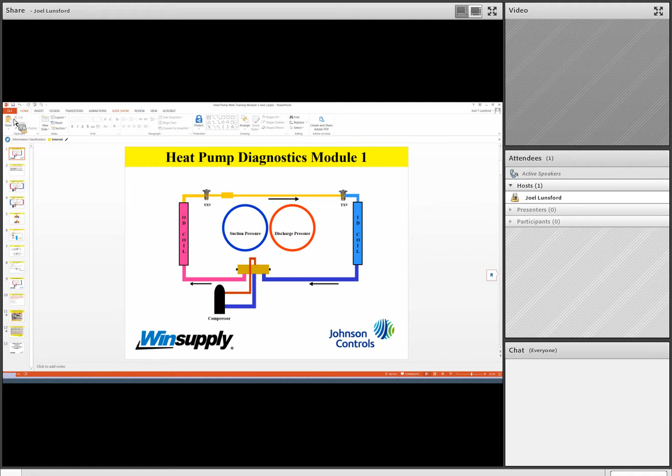Okay, at this time we're going to go ahead and do Heat Pump Diagnostic Module 1.

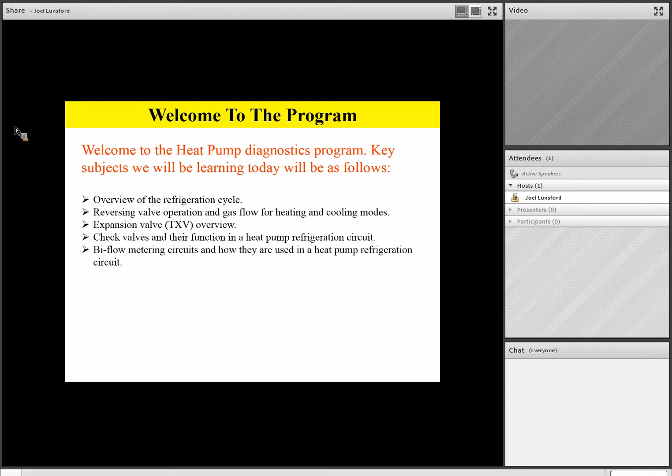refrigeration cycle. So the first thing we're going to talk about today is going to be our refrigeration cycle in the cooling mode. As we take a look at our diagnostic screen and the graphic, you'll notice that starting at the compressor, we have a hot gas line coming from the compressor into the single line into the reversing valve. Now remember, team, when we're in the cooling mode of operation, the outdoor coil is a condenser and the indoor coil is acting like an evaporator.

You'll also notice on the screen that the outdoor coil in the cooling mode will be color-coded red or a bright pink, indicating it's hot gas going into that coil. You'll also notice that on the indoor evaporator in the cooling mode of operation, the coil is color-coded blue, indicating it's cold or cool. So from the compressor, we have hot gas to the single line on the reversing valve, and in the cooling mode of operation, we divert that hot gas to the outdoor coil that's

acting like a condenser. We then come out of the outdoor coil through a bi-flow TXV, and remember, team, in the bi-flow configuration, in the cooling mode of operation, the bi-flow TXV outside has to flow that liquid refrigerant out of that coil freely. So we have liquid refrigerant going through the outdoor bi-flow TXV in the cooling mode. We go through a bi-flow filter drier down the liquid line to our bi-flow TXV on the indoor coil.

Now remember, in the cooling mode of operation, the bi-flow TXV should be metering refrigerant into the cold coil, and it is, and we see that as being a blue color code. We then meter refrigerant into the indoor coil where it boils off, absorbs heat from the air passing over the coil, and changes state into a cool vapor. That cool vapor then travels down the indoor coil vapor line back to the reversing valve where it loops through the reversing valve back to the common suction line on the compressor.

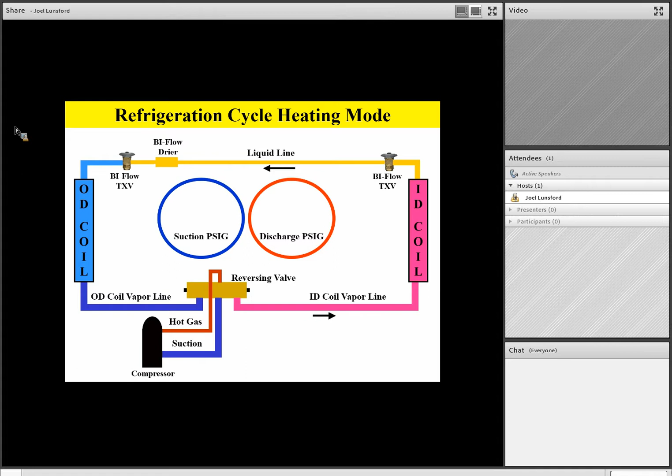In the heating mode of operation, we shift that reversing valve, and now we have hot gas from that single hot gas line from the compressor going to the indoor coil that's acting like a condenser. And then the outdoor coil is acting like an evaporator, so we have cool gas coming back from the outdoor coil, looping back through the reversing valve to the compressor suction line. So as we take a closer look, the reversing valve is responsible for diverting hot gas either to the outdoor coil in the cooling mode or the indoor coil for the heating mode. And this is how we achieve heating and cooling operation on the heat pump.

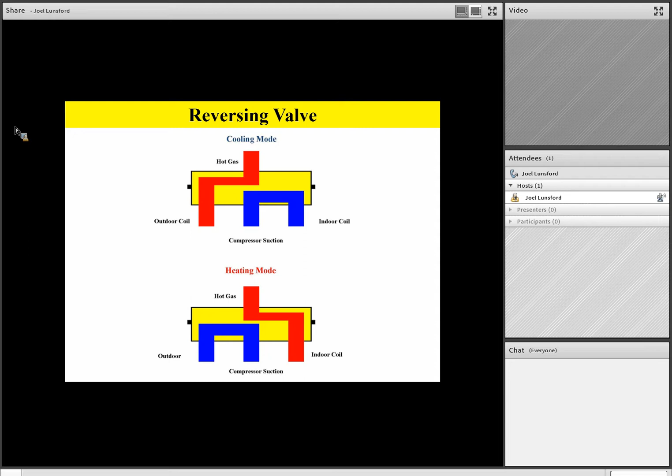A very, very important device in the heat pump is an expansion valve or some sort of metering device to meter refrigerant into the cold coil. Now, team, at this time we're going to stop using the verbiage of evaporator and condenser, because we found out in our review that it doesn't really matter which coil is acting like a condenser or evaporator. In the cooling mode of operation, the outdoor coil is warm and the indoor coil is cold, and in the heating mode of operation, the indoor coil is hot or warm and the outdoor coil is cold.

That sensing bulb is clamped onto the cold suction line or the cool vapor line leaving the cold coil, and inside that sensing bulb there's actually a refrigerant. That refrigerant, when it starts to warm up inside that sensing bulb, will exert pressure on top of the diaphragm of the expansion valve, also called the TXV, and it will drive the valve open against spring tension. As we drive that valve open, we'll actually add more refrigerant into the cold coil. As we add more refrigerant into the cold coil, it'll start cooling down some.

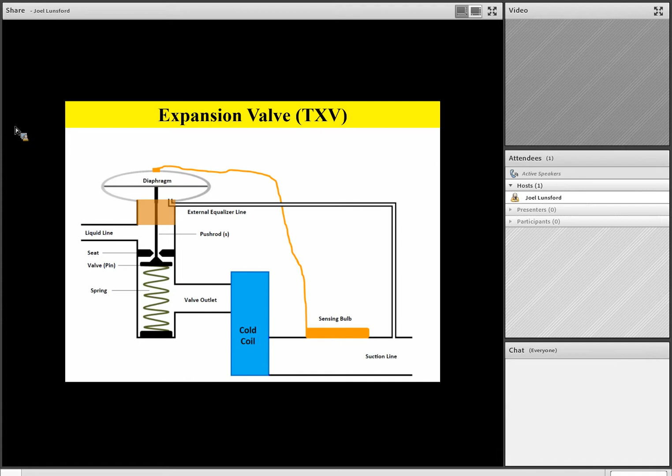The next thing we're going to talk about in our heat pump module 1 today is check valves. You're going to have some sort of check valve in the liquid refrigerant circuit on a heat pump in order for it to operate in both heating and cooling mode. We achieve that with a device called a check valve. Now the check valve is very, very simple.

So a check valve is a very simple device that blocks refrigerant flow in one direction, but when refrigerant is flowing in the opposite direction, it allows it to flow freely. This is a key point we need to remember. Check valves are an integral part of a heat pump refrigeration circuit.

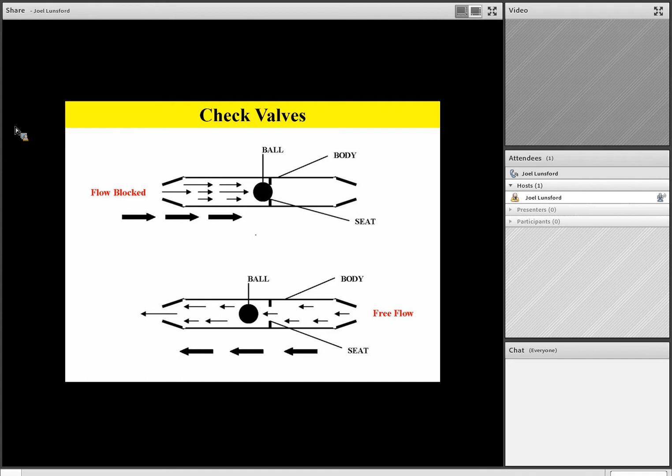If we take a check valve and an expansion valve and put them together into an assembly called a bi-flow metering circuit, what we then have on a heat pump is a circuit that in one direction meters refrigerant into the coil when it's acting like a cold coil. However, in the opposite mode of operation, when that coil is acting like a warm coil or a condenser, we allow that refrigerant to flow freely out of that coil.

Any of those three combinations, check valve with a separate TXV, a bi-flow TXV where the check valve is built inside, or the orifice or piston assembly, they all work the same. In one direction, they meter refrigerant into the coil when it's a cold coil, and in the opposite mode of operation, when that coil is warm and acting like a condenser, it unseats that check valve assembly and allows that liquid to flow freely in the other direction.

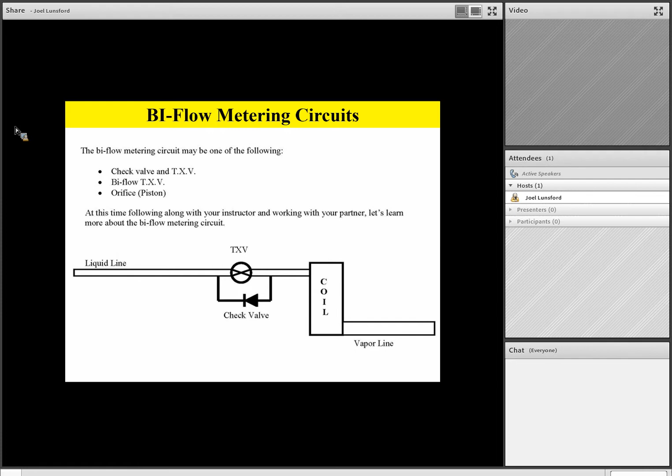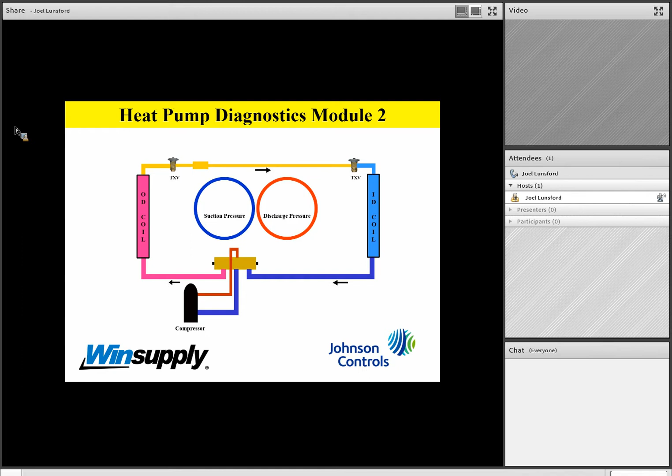Okay, at this time, let's go ahead and jump into our heat pump diagnostic module 2. And again, we'd like to welcome you to this portion of the program where we will be discussing variable speed air handler control boards. In addition, we're going to be looking at all the inputs and outputs of the control. And this is a skill every technician needs. So please follow along as we discuss the following key points.

We're going to talk about low voltage inputs and outputs on that control board. We're going to touch on the communication bus and terminals, humidifier and electronic air cleaner outputs, and heating, delay, cool, and adjust jumpers on this variable speed air handler. Now it should be noted, team, the reason we selected the variable speed air handler is because it's the most complex air handler as far as low voltage wiring is concerned.

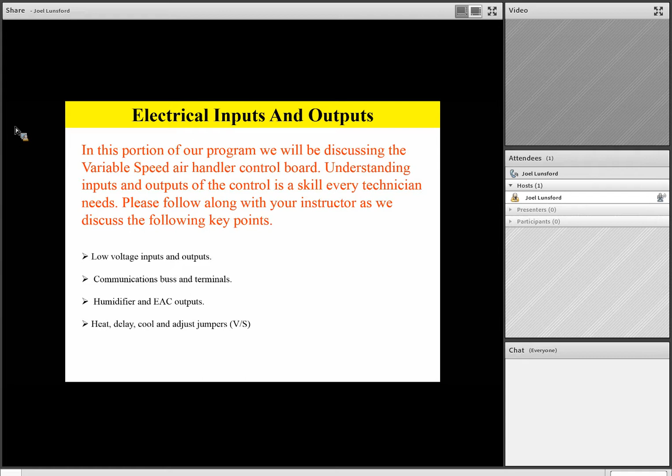If you can wrap your head around how this wires, you can literally wire anything in our inventory of residential indoor products. So let's go ahead and review this at this time. We'll go over every input and output on the board as we talk about the variable speed air handler control.

So please take your handout that shows this picture of your variable speed control board. We're going to ask that you follow along with each input and each output. Now it should be noted, let me make a qualifier.

It should be noted this board is not going to come from the factory with all of the wires off the board. We've removed all the harnessing off the board so that it's easy to look at on our PowerPoint presentation today. So it should be noted this board will have some harnessing from the factory and some pigtails from the factory to where you'll actually hook up your thermostat. But we've taken all that harnessing off so that we can look at the board easily on our handout and on our PowerPoint presentation today.

So please take your handout or your workbook and find the page that has the air handler control board variable speed, and please follow along and make notes on that page as we go through all the inputs and the outputs on the variable speed board for your education today.

So starting on the left-hand side, it should be noted that this variable speed air handler board is communicating capable. And you'll notice that there's going to be a service tool input as well as an A, R, C, and B. The A, R, C, and B will be your 4-wire communicating wires from your communicating thermostat on the wall down to those 4 terminals A, R, C, B. And then you'll take those same 4 wires outside if you have a communicating outdoor unit.

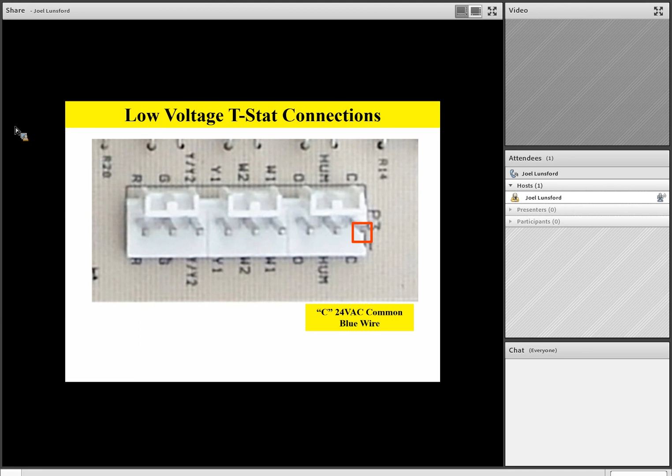Right next to the hum and purple wire, we have a blue wire, and that's our 24 volt common terminal. So if the contractor chooses to use a conventional 24 volt thermostat wiring configuration, these are the wires, and the pigtails are the terminals that will be used. And remember, team, it'll be harnessed in from the factory with about 6 to 8 inches of pigtail wires for the contractor to hook the air handler up to.

Okay, want to thank everybody for your attendance today. This concludes Module 1 and 2 for our heat pump diagnostic modules.